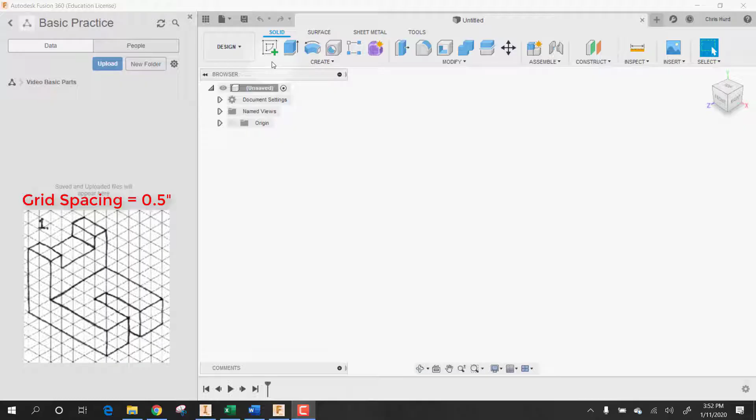Let's use Autodesk Fusion 360 to make some very simple parts. I'm going to start with a sketch. And I'm going to sketch a rectangle. And I'm going to do this subtractively. So this rectangle has to be 2.5 by 3.5. And then I'm going to make another rectangle and cut this out.

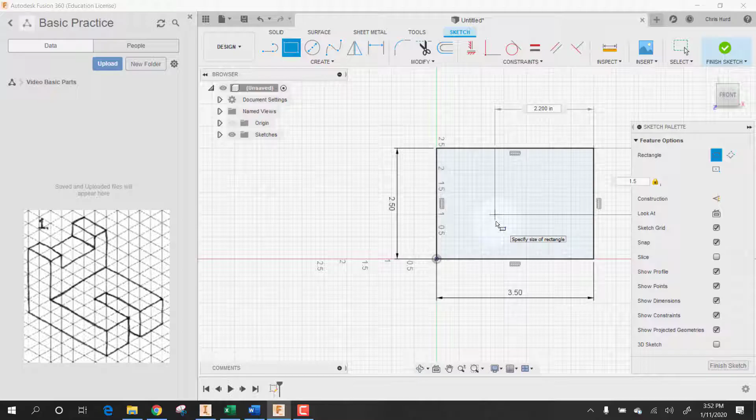So this has to be, let's see, 1.5 by 2.5. I pick the part that I want, right click, press pull, and then I know that that has to be 2.5 in depth, and say enter. There's my part.

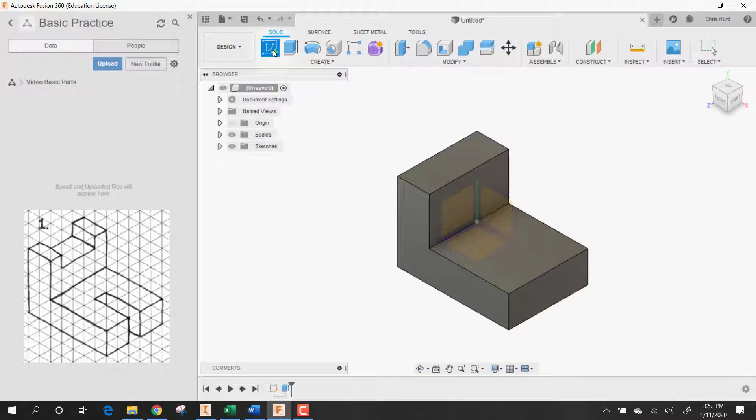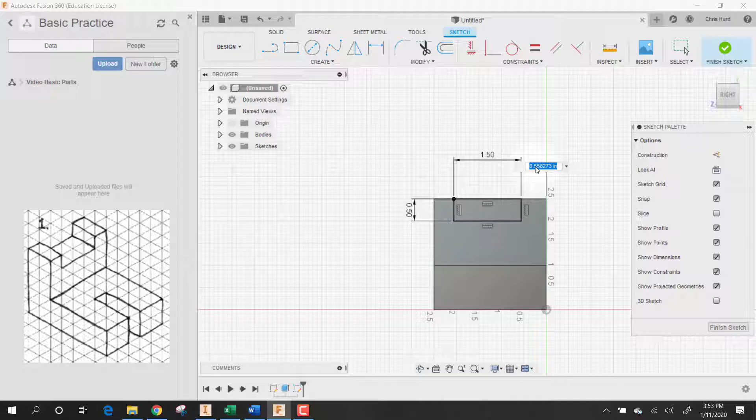I'm just going to make another sketch, put it on here, and cut out the first section. Use my 2-point rectangle. I'm going to make sure I lock onto that top line, and then I'm going to make it exactly 0.5 by 1.5. The only other thing I want to do is I want to make sure that I dimension from here to here. I want that to be exactly 0.5. I've forgotten that at least once before.

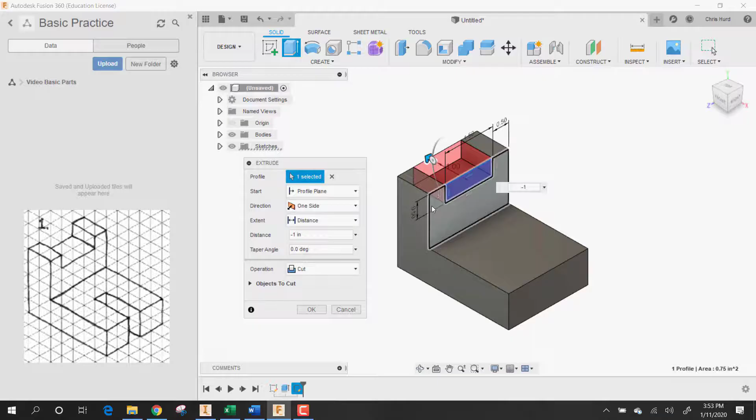And click on the part that I want, right click, press pull, choose it, and if I type in minus, it will automatically cut the part out. So if you take a look, you'll see it shows the right direction when I put the minus in there. Say okay, it'll cut that right out.

Put another sketch on here. I'm going to sketch my rectangle. Again, make sure I lock onto that line. And make this 0.5 by 1.5. Dimension it from one edge to be exactly 1 inch.

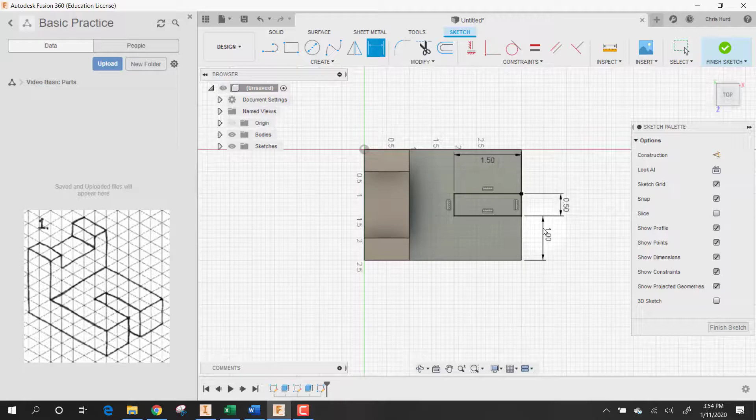Right click, press pull, choose the part that I want, and if you wanted, you can drag it down until you get where you want it. That's subtract the 1 inch, say okay. And our part is done. It's that easy.